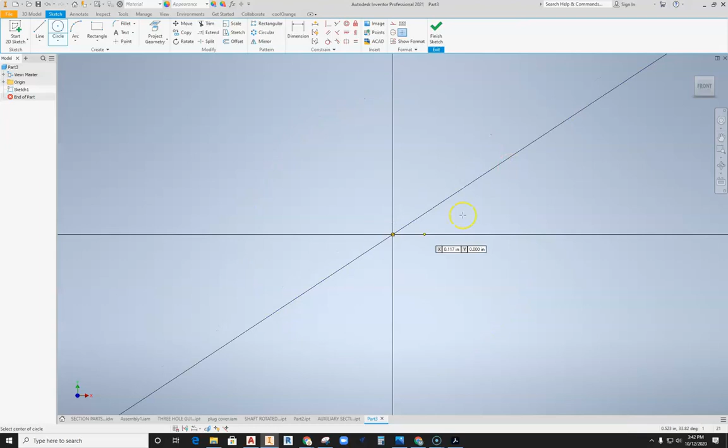So let's go ahead and jump into Inventor and start drawing the part. I'm going to grab a 2D sketch, place it on a plane, grab my circle tool and pull, and we'll go ahead and start out with that 6-inch diameter circle first, and we'll go ahead and finish and set that extrusion up. We're going to jump back into the drawing here and see that that 6-inch diameter circle has an extrusion here of 0.5, so we'll jump back in here and set that extrusion depth at 0.5.

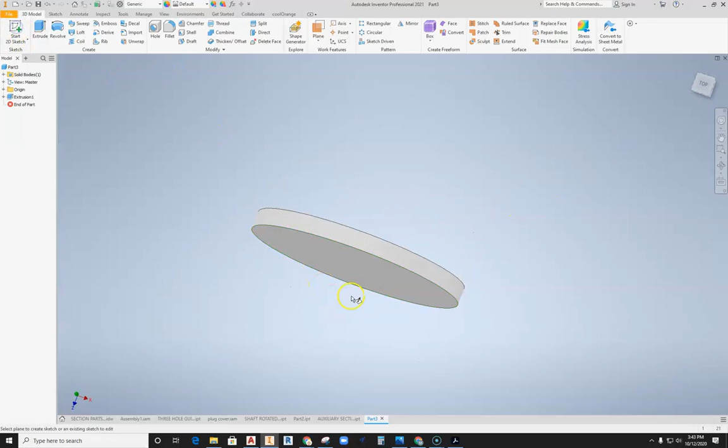Now we're ready to continue building. So we'll go ahead and spin this thing around. We'll make this now the bottom - well, we'll keep the cube looking somewhat correct. So then we'll go to here, jump onto the bottom here, and now we'll keep drawing.

So I think the next one is going to be a 5. Come back and take a look - what is that next one supposed to be? So the first one is 6, the next one is 5. Let's go back and do that then. Alright, so we're going to come out 5. There's my 5. Finish the sketch.

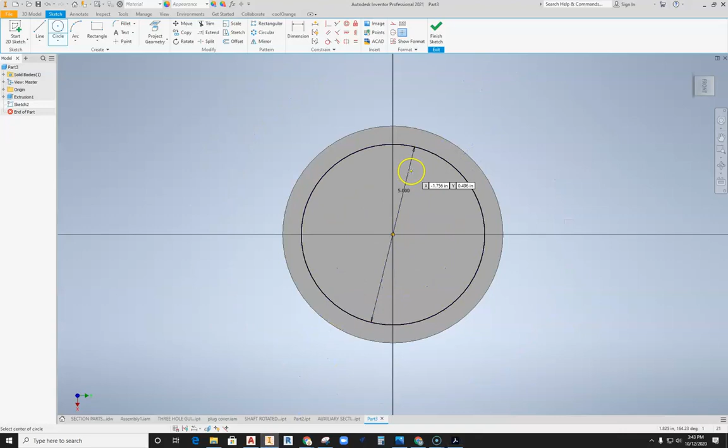We're going to extrude that. And that 5 is 0.75, so we'll come back to here. We're going to do 0.75. There we go. Alright, so continue on.

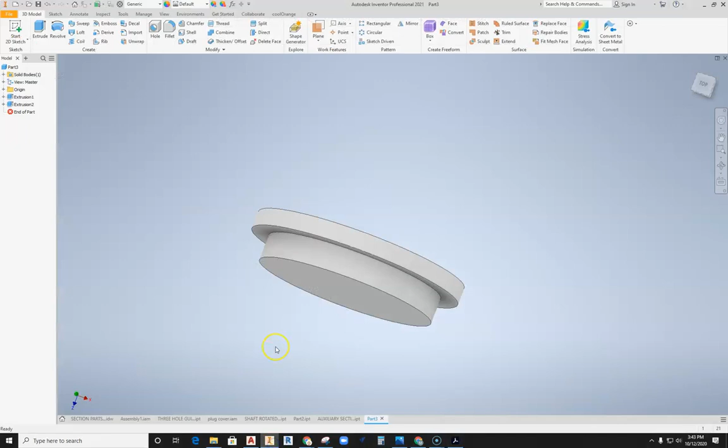The next thing is we're going to do 2.25 circle, and that's going to be a 1-inch extrusion. So again, start 2D sketch, drop it on the bottom, and start this out 2.25. Finish the sketch and extrude again. See sort of a repetitious 1-inch working here.

So now we're good, now we got to start working on the top. I can see that the length of this part is given from 2 places: one from this center line, and that's 2.75 - that's going to be the dimension we're going to use, as well as this dimension here, this 4, from the top of the angle down to the surface of the disc. So we're going to work with both of those and the 135.

What we need to do is we need to get an angled work plane that is going to be then parallel to the top of the surface, and then we're going to do an offset work plane that distance of 2.75. So let's go ahead and start setting this up so we can work that out.

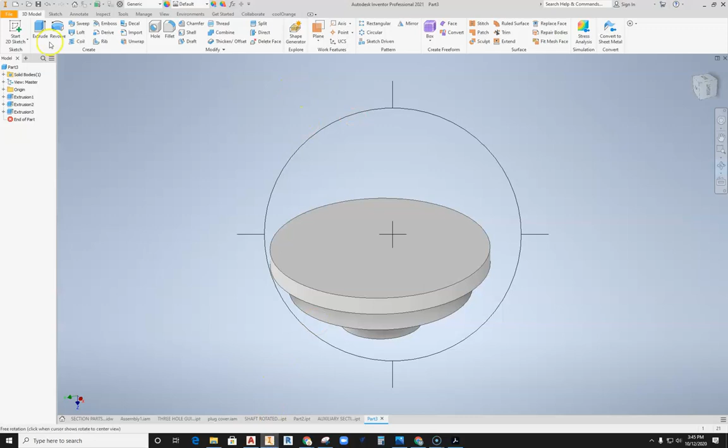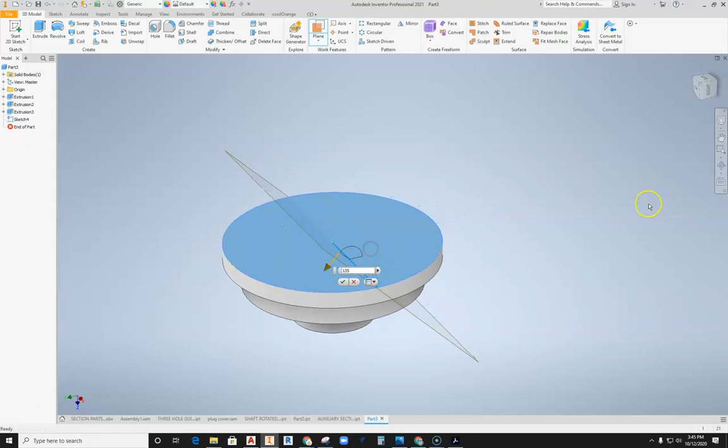So I'm going to jump back into Inventor and grab a sketch, drop it on the face, and I just need to get a line to start working with because I need to get an angled surface. So to set that up, I'll grab my work plane, I'll select the line and then the surface, and then I can see that I'm going to turn this angle. So the information I was given was that 135 for the angled surface, so that's going to work out just fine. So we'll do a 135, and then we're going to go ahead and hit the green check.

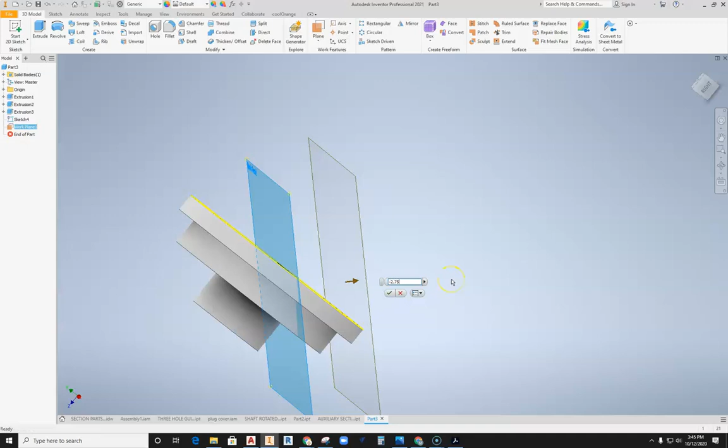Now I want to take, and this time I definitely want to do an offset plane. So I'm going to select that surface and pull up, and this is where I'm going to set up. And so this is going negative - I'm going to do negative 2.75. And then that sets that work surface up away from that part for me.

Okay, so with that set, I can go ahead and grab my sketch, drop the plane on the face, and now I can continue to sketch. So now I've got to figure out, well, what size circle am I working with? Well, that's where that auxiliary comes into play.

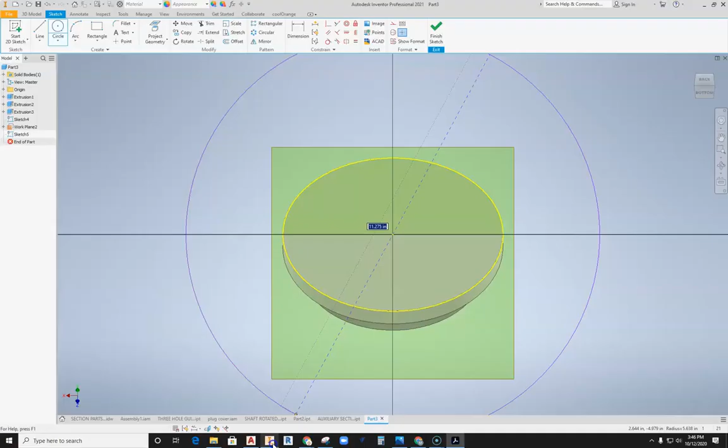So I know I'm going to set up two different circles here. One is going to be 1.25, and then an interior circle or surface that's going to be 1.5. So we're going to go back here into Inventor, and I'm coming out. Now that was a radius, so I'm going to change this up to radius. I'm going to do 1.25. That's the outside surface.

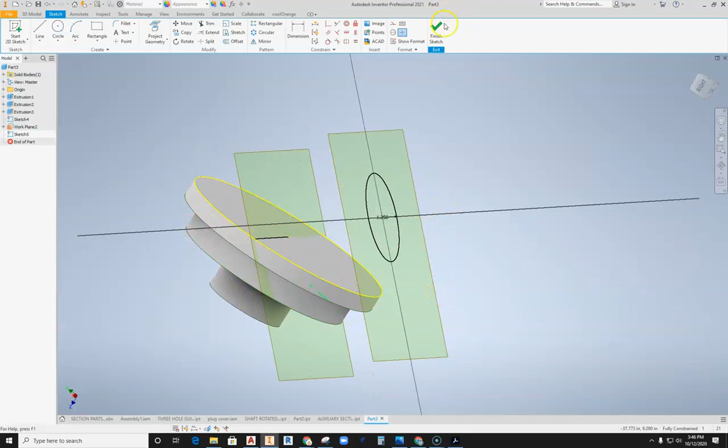So what I'm probably going to do is go ahead and just extrude this first before doing anything else. So finish the sketch. I'll grab my extrude tool, and I want to now extrude to the surface.

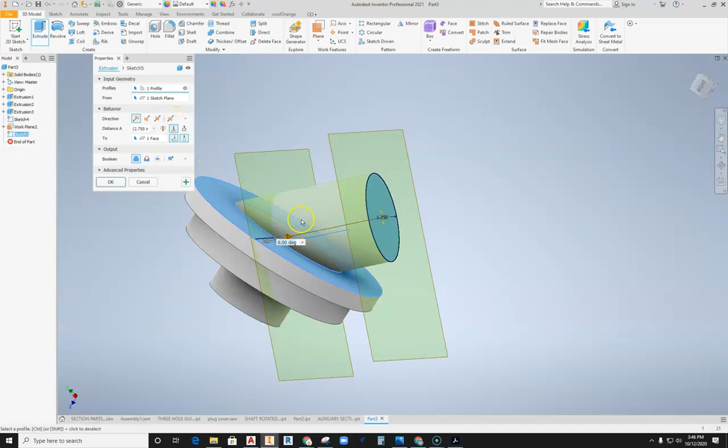Now, if I just pull this out, it's not going to really work the way I want. I want this to actually miter into the surface. So I'm going to now go ahead and grab this tool. This is the to-surface tool, and then I select this surface, and then it actually projects and has a nice miter to the surface. So that takes care of that extrusion.

Now what I'm looking to do to get a hole through here is look at the hole. This hole actually comes down and sort of blends together again on a mitered surface. So I want to use a sweep tool to do that. So we'll learn a different tool here as well.

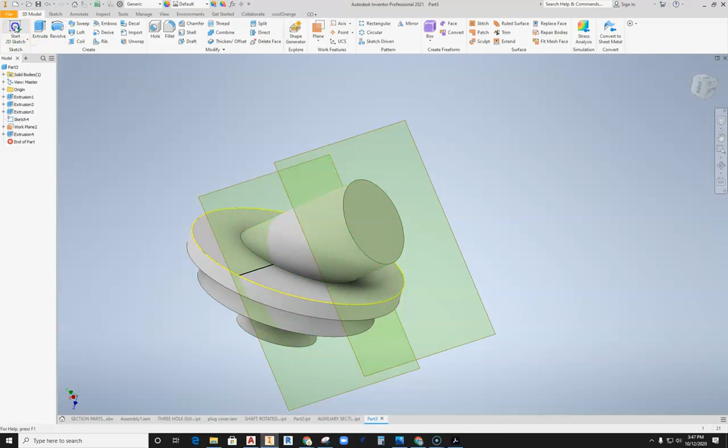So as I jump back in, I'm going to go ahead and put the profile on this particular face. I'll go ahead and grab my circle tool and pull this out, and I believe that's also a diameter, and that's 1.5. Okay, so I have a 1.5 diameter circle here. Good. And then I'm going to set up my sweep edge.

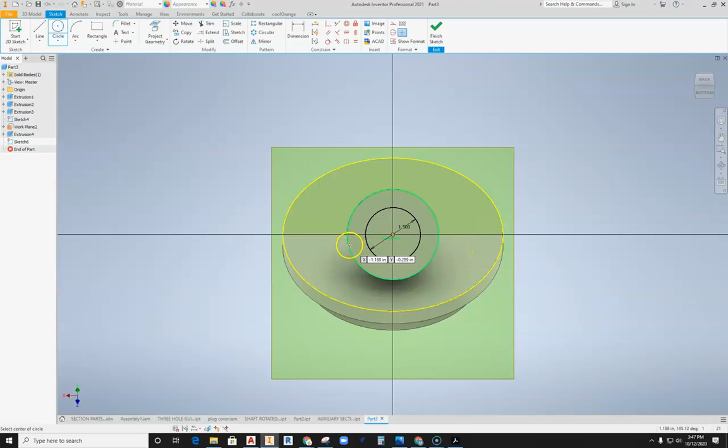So to do that, I need to create a half section view and draw right down through the middle of this part. So to do that, I need to go ahead and get a line that I can utilize for that. So I'm going to hit Finish Sketch here, and then I'm going to get back onto the sketch that I used on the surface here. That would be this sketch.

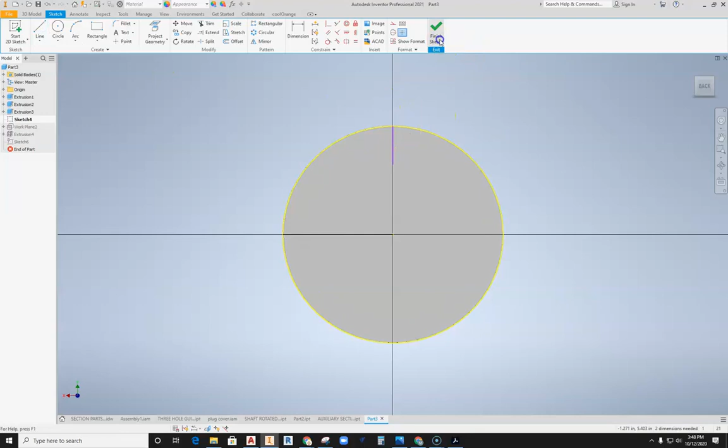So I'll jump back into this sketch, and I'm going to then create a line that's going to go just here through the middle, and then I can utilize that line to set up a new work plane that is at 90 degrees to this part. So you can see that that work plane would be going directly straight through the part. Alright, so that's good. We'll hit that.

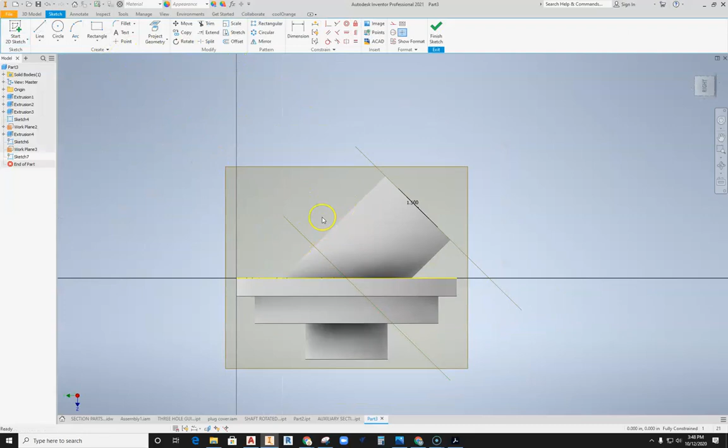And now I can take and put a sketch on that new work plane. Now, to make life a little easier, let's do a half section view. So let me actually get out of the sketch here. Let's do View, pull down half section, or pull down my View tab and actually select half section and click on that work plane. What that's going to do is cut half of this part away, which is great. So I'm going to hit that green check.

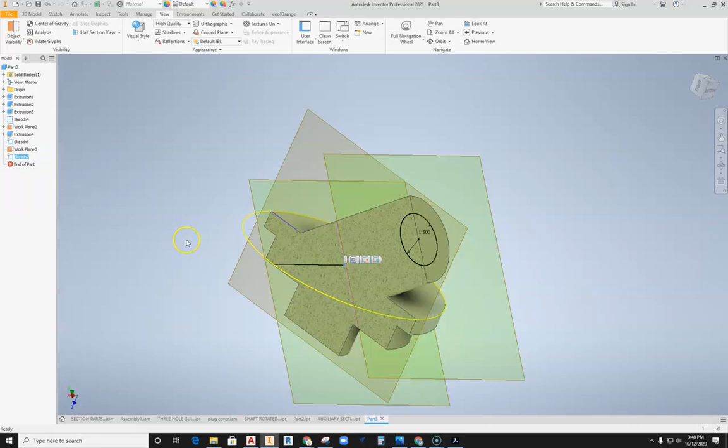Now I can start working that sketch that I just had placed there. So I'll go back to set that sketch on the face. Now I'm ready to draw. And when I'm drawing on this, you can see I'm actually drawing right through the center of the part. I can see what I'm doing. So it helps out an awful lot.

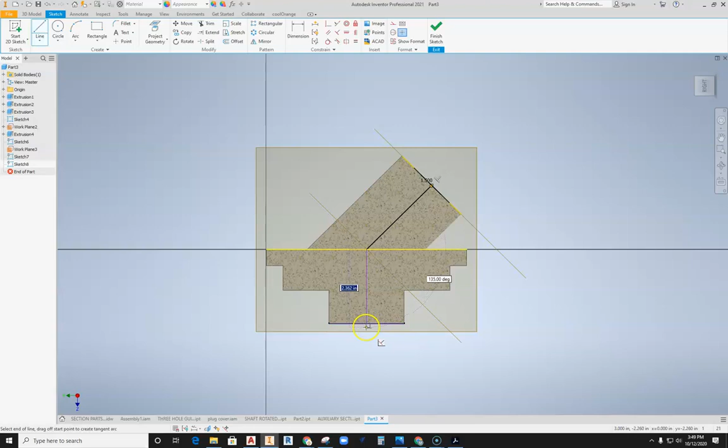Grab my line tool, and we need to go from center point here, coming straight down to point, and then straight down to point. Good. So now I have my sweep location here set, and I think this geometry here might cause me a problem. We'll see what happens here.

Let's go ahead and try the sweep out. So we're going to use that profile, and then let's tell it the path that we want is going to run straight down through.

That worked out fine, probably because it's on a different sketch. It's not finding that geometry. So with this profile, you can see that it's going to run down through here.

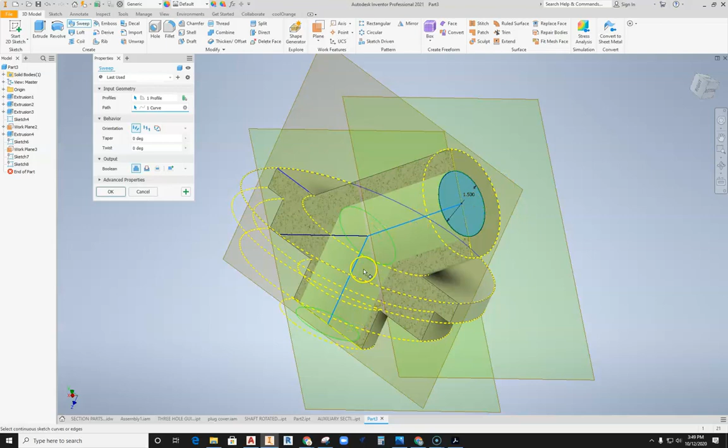Now the problem is that it's joining right now. It wants to create geometry. I don't want to create, I want to come over here and select Cut. So it's red, and we're now going to cut. I hit the green check, and you can now see that I'm working right down through the center of the part.

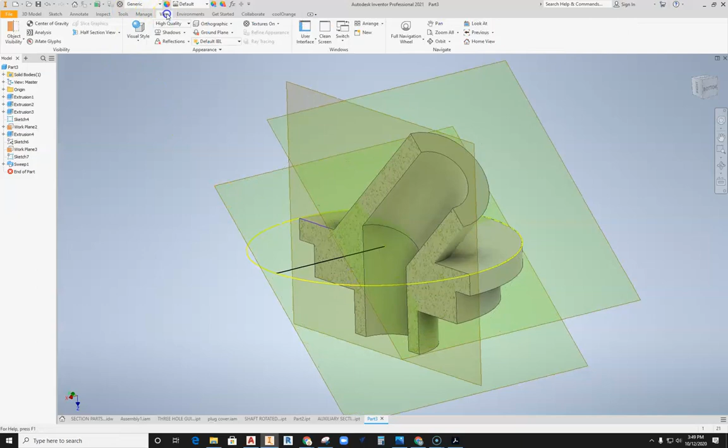Modeling all at the same time while I'm viewing it. So if I get back into here and say End Section View, now I can see that this is my full part all taken care of.

Last thing we need to do here is add a little supportive rib to this part. So we'll go back to the drawing and take a look. The rib looks like it's 0.5 thick, and it looks like the thing comes off the surface here, a little offset from the surface at 0.25, and then the height is looking like it's a 1-inch height.

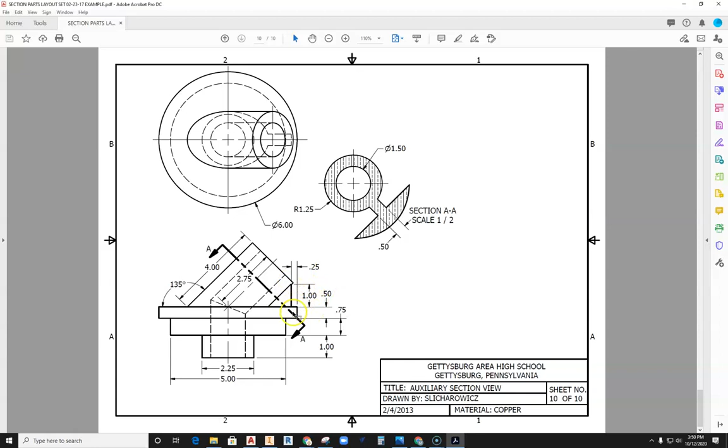So let's go back into Inventor. I'll go ahead and put a sketch on the face here, and I'm going to offset this geometry here. So go ahead and use my project, grab my offset, click and pull, and type in 0.25. So that offsets that edge in 0.25.

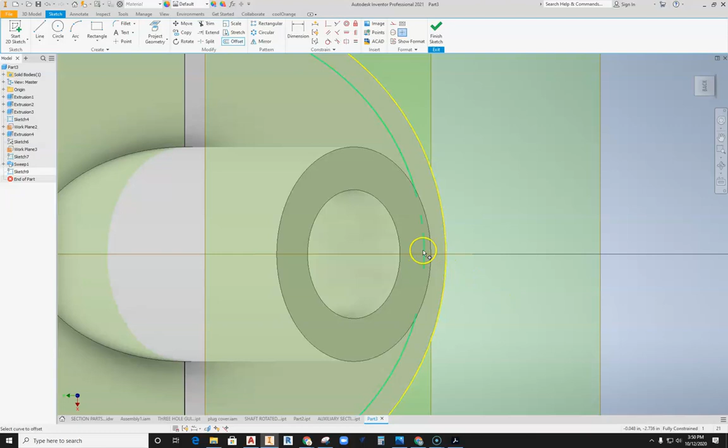And then we'll go ahead and create some rib geometry here. We're not going to use the rib tool, we'll do this a little differently. But I'm having trouble seeing through this part, so let's do that again.

We'll grab the View tool, grab half section. This time we're going to select the surface, and that's exactly what I want to do. So I hit the green check, and I come back out, and you can see this is where I'd want to be drawing.

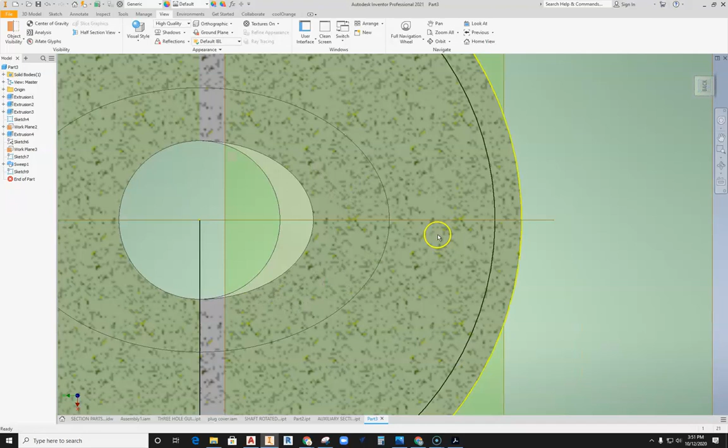So with that good, get back into that sketch. I did my offset, and now we can keep drawing. So let's come out from the center, make sure things link up. And I'll use my offset tool this time, because I remember that thing was 0.5 overall. So if I come and offset this by 0.25 in each direction, that works great.

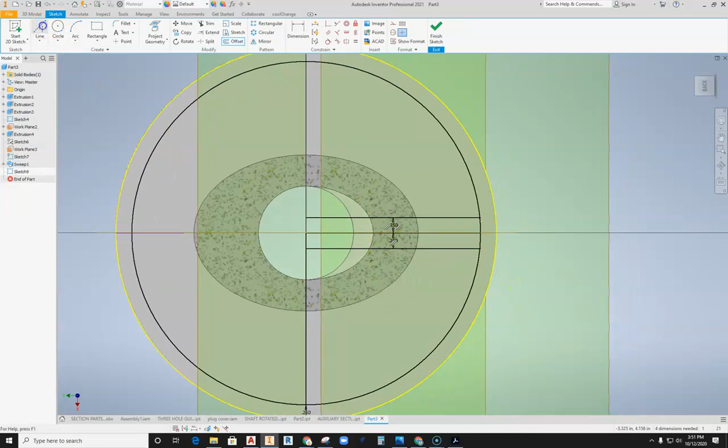Now I just need to do some trimming. I don't really want to go too far into the part, just need to get into this part. So if I just select and come up to here, now let's do some trims. I don't need this or this, I don't need that. And that's all trimmed up.

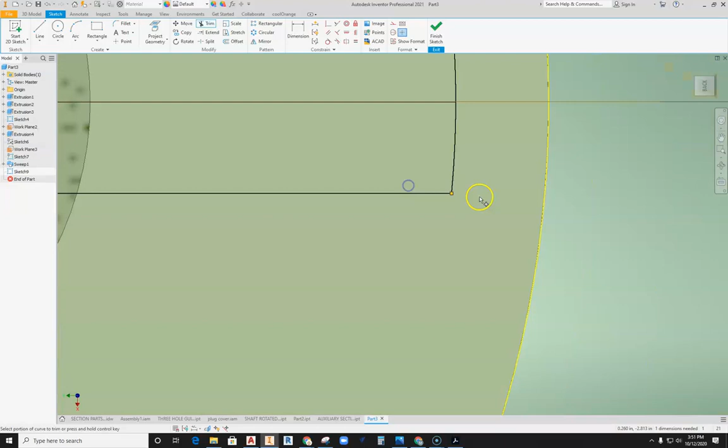Now let's get rid of this little niblet right there, and we'll get this little niblet right there. Alright, so it looks like we're good to go. Hit escape a few times. I don't need that line anymore. That's what I'm looking to extrude.

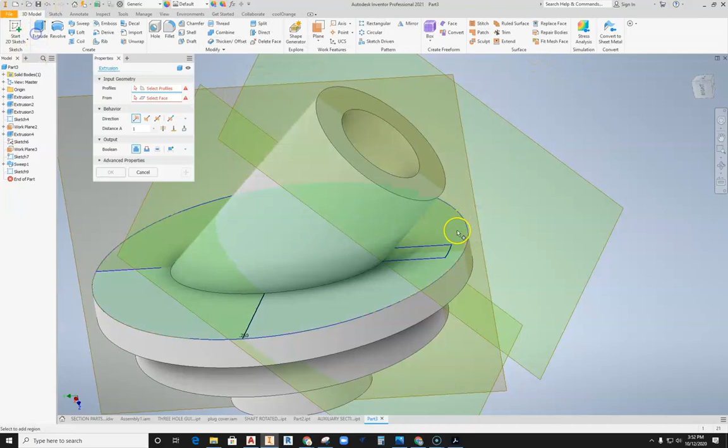So let's turn our part up here, and then let's turn back on the full drawing, and then we can start the extrude. You can go up here to 3D model, grab the extrude button. When you're grabbing that in the 3D model, it can be a little tricky to mouse back and forth over this, but just make sure it highlights properly, and then you can grab it.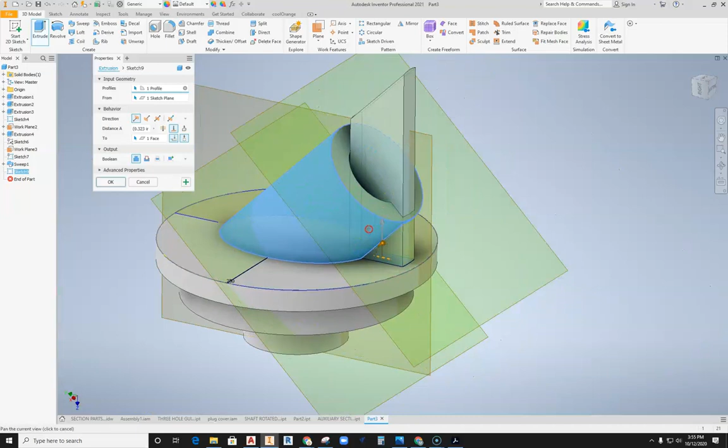Now the next thing you want to do is we want this to run up. If you were to grab this tool here and select, it might run up to the other surface because it's seeing tangent, and it's not necessarily going to see that particular surface. But if you come over to the next button here called 'To', it's going to recognize to the next surface, which is great, that's what we're looking for. Then we can hit OK.

So now I can see I've got that stiffening web, or stiffening rib I should say, in position. It's not running into the hole, and it's all set and ready to go to be laid out.